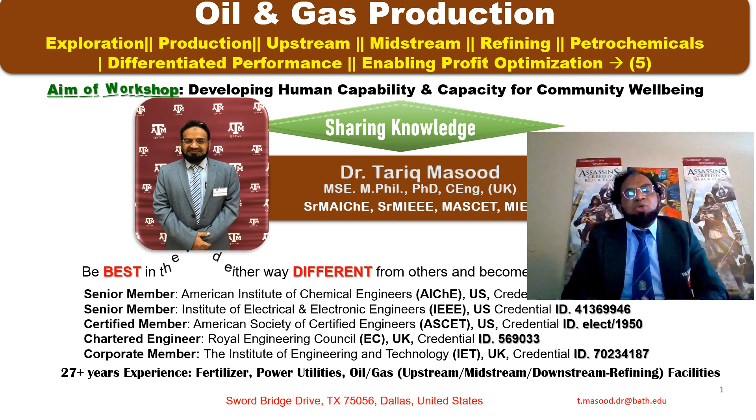Before my lecture, I used to read a Quranic verse, Qala Rabbi Shrahli Sadri wa Yassirli Amri Wahlal Uqdatam min lisani Yafqahu Qawli Allahumma Rabbi Zidni Ilma. O my Lord, open my chest and ease my task for me and loose a knot from my tongue that they may understand my saying. Allahumma Rabbi Zidni Ilma, O Allah, advance me in my knowledge and true understanding. Thank you very much for your precious time.

Okay, dedicated to faculty members and students, Department of Chemical and Environmental Engineering, GCT and NFC-IET Multan, Pakistan. In particular, Professor Dr. Saeed Ahmed, rest in peace, and Professor Dr. Afzal Haq, former Vice Chancellor and pioneer of NFC-IET Multan, Pakistan, and former VC of NED UET Karachi. And certainly Professor Dr. Tahir Imran Qureshi, Maestro of Organic Chemistry.

Faculty members and students, Department of Petroleum and Chemical Engineering at Texas A&M University, College Station and Qatar campus. Faculty members and students, Department of Chemical Engineering, Gas Processing Center, Industrial Engineering at Qatar University. Management and operations and maintenance staff members of Pak Arab Fertilizer: calcium ammonium nitrate, nitrophosphate, urea, nitric acid, ammonia, and OGDC, Oil and Gas Development Corporation, in particular Qadirpur gas field, Ghotaki, Sindh, Pakistan.

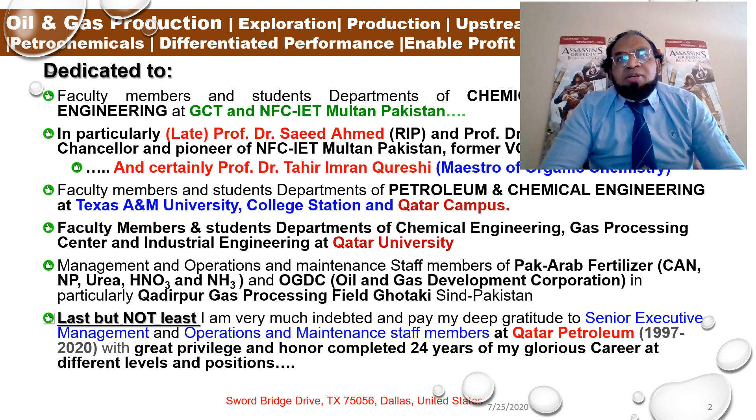Last but not least, I'm very much indebted and pay my deep gratitude to the senior management and operation and maintenance staff members at Qatar Petroleum from 1997 to 2020. With great privilege and honor, I have completed 24 years of my glorious career at different levels and positions in Qatar Petroleum. Thank you very much everyone for your belief in me and your unprecedented support.

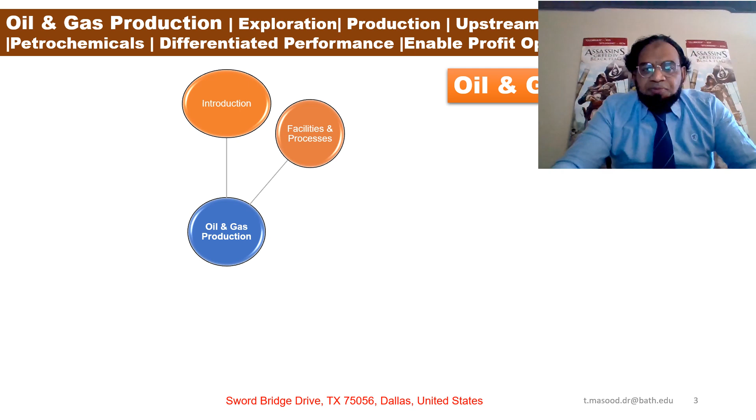Production. Okay, this slide demonstrates my plan for the next couple of years to deliver more than 300 lectures. Introductions, facilities and processes, reservoir and wellhead management system, upstream facilities, midstream facilities, refining facilities, petrochemicals, utility system, conventional and unconventional resources and environmental effects. Okay, on my next slide, I will demonstrate what I have contributed over the last 24 years with Qatar Petroleum.

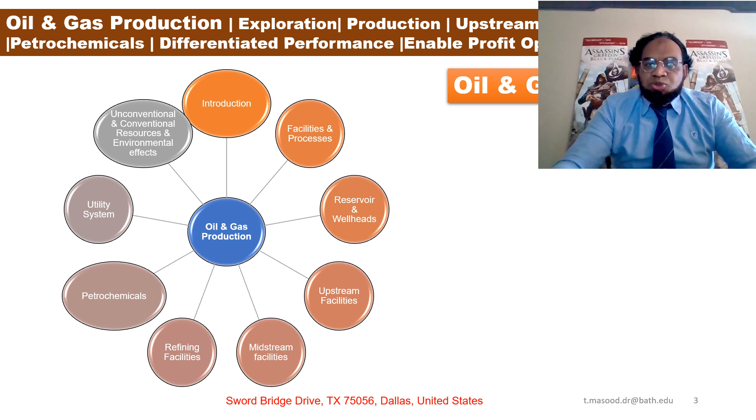Okay, shaping the clean and sustainable global energy. As I mentioned earlier, I'm Dr. Tariq Masood. I have contributed significantly and developed in-house a large number of models by using artificial intelligence. First model, Operation Excellence, 20 initiatives framework and TORs developed and implemented. More important, second, a flaring surveillance model, monitoring and measurement we have implemented. A gas lift management system and gas balance dashboard management system we have developed and implemented.

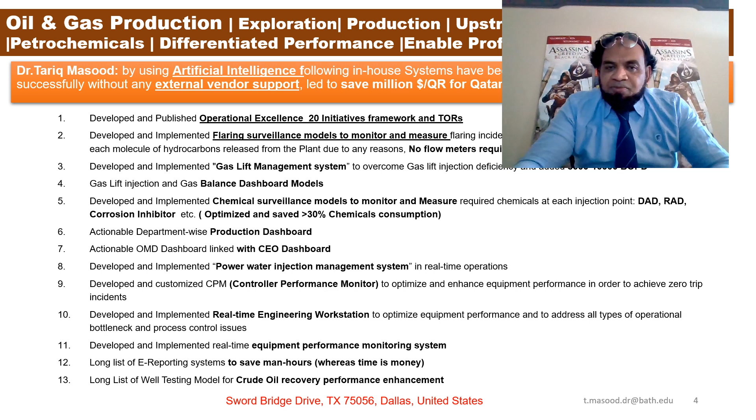Number 5, developed and implemented chemical surveillance models. Number 6, actionable production dashboard, including a CEO dashboard and power water injection management systems, CPM controller performance monitoring systems, real-time engineering workstations, equipment performance and monitoring systems, and a long list of e-reporting models developed and implemented. Last but not least, a long list of well-testing models developed and implemented in Qatar Petroleum by and large.

Okay, on my next slide, we'll give a brief about my lecture number 5 and key takeaway points. So from my next slide, we'll give a brief about the key takeaway points from lecture number 5, and then I will run the complete lecture number 5. What is the upstream processing section? Okay, these are my key takeaway points from lecture number 5.

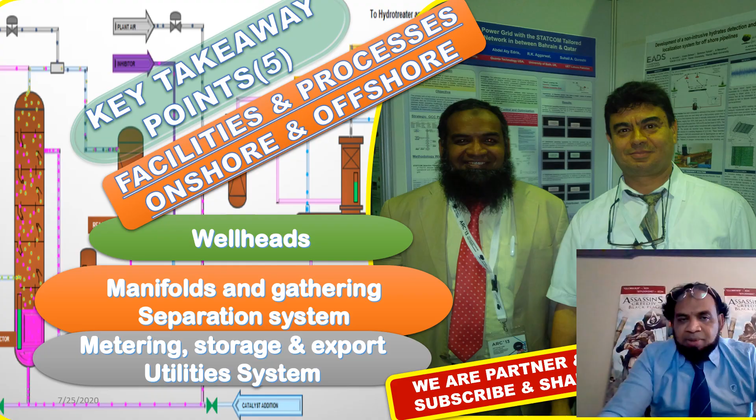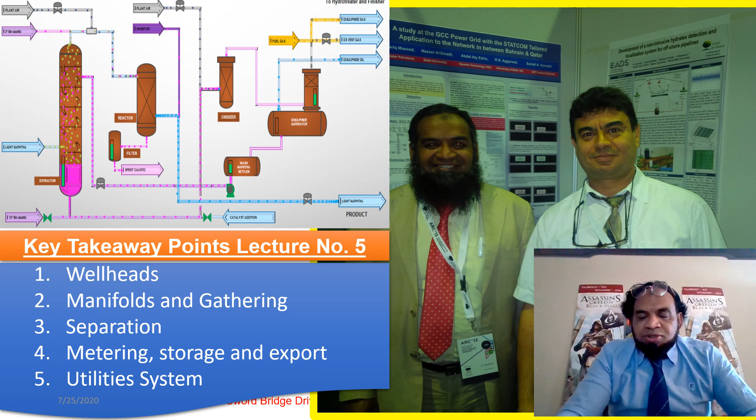We're going to discuss number 1, wellheads, then manifolds and gathering system, separation system, number 4, metering and storage export system, and number 5, utility systems. These are the 5 sections we will discuss today as far as upstream facilities or processing sections are concerned.

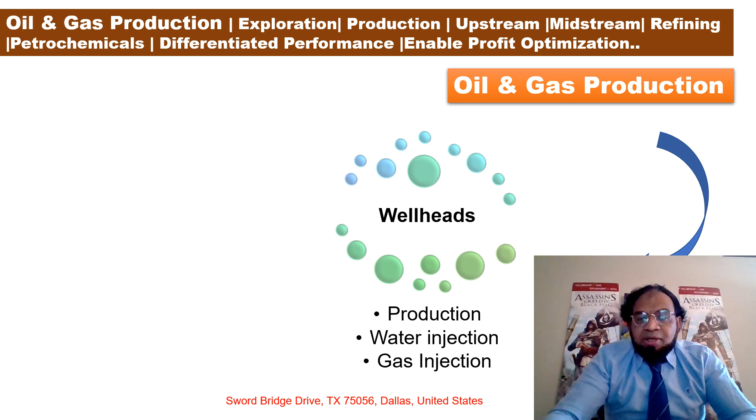Okay, oil and gas production. The first segment we are going to discuss is the wellhead. The wellhead constitutes 3 types of wells: production wells, water injection wells, and gas injection wells. What it basically demonstrates: once a natural gas or oil well is drilled and it has been verified that commercially viable quantities of natural gas are present for extraction, the well must be completed.

To allow petroleum or natural gas to flow out of the formation and up to the surface, this process includes strengthening the well hole with casing, evaluating the pressure and temperature of the formation, and installing the proper equipment to ensure an efficient flow of natural gas from the well. The well flow is controlled with a choke valve, so it has different dimensions.

We differentiate between a dry completion, which is either onshore or on the deck of the offshore structure, and a subsea completion, which is below the surface. The wellhead structure, often called a Christmas tree, must allow for a number of operations relating to production and well workover. Well workover refers to various technologies for maintaining the well and improving its production capacity as far as demand is concerned. Okay, on my next slide, we will discuss manifold and gathering system.

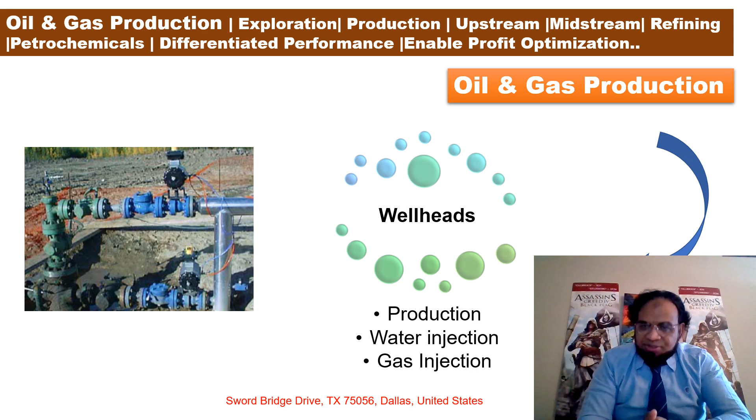In my earlier slide, we discussed the wellhead. Now we are going to discuss manifolds and gas gathering system. Okay, first a gas gathering system, second segment is a pipeline, and number 3 is the reservoir utilization. What it basically demonstrates: it has 2 layers. First is onshore and second is offshore.

The individual well streams are brought into the main production facilities over a network of gathering pipelines and a manifold system. The purpose of these pipelines is to allow sets of production wells to be selected so that, for a given production level, the best reservoir utilization is achieved. Well flow composition, that is gas, oil and water, can be selected from the available wells. For gas gathering systems, it is common to meter the individual gathering lines into the manifold, as we have seen in the pictures here.

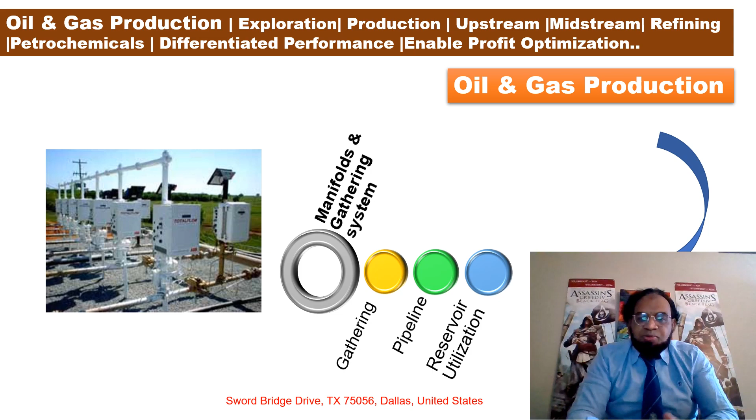So for multi-phase flow, a combination of gas, oil and water, the high cost of multi-phase flow meters often leads to the use of software flow rate estimates that use well-test data to calculate the actual flow rate. Okay, on my next slide, we will further discuss how the manifolds and gathering system can further contribute to compression and other parts of the process.

Okay. Before starting the separation system, I just want to give the second layer of manifolds and gathering system. In my last slide, I discussed only onshore and I missed offshore. Offshore, the dry completion wells on the main field feed directly into a production manifold, while outlying wellhead towers and subsea installations feed via multi-phase pipelines back to the production risers. Risers are a system that allows a pipeline to rise up to topside structures for floating structures. This involves a way to take up weight and movement.

For heavy crude and Arctic areas, diluents and heating may be needed to reduce viscosity and allow the flow. So that is important offshore as far as heavy crude is concerned.

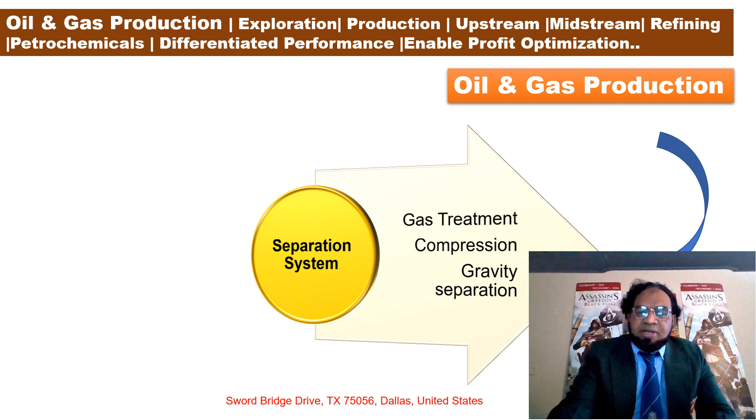Okay, now we will discuss the separation system. First, the separation system is constituted of gas treatment and compression, and gravity separation. What it basically demonstrates: some wells have pure gas production which can be taken directly for gas treatment and/or compression, or more often the well production is a combination of gas, oil and water with various contaminants that must be separated and processed.

The production separators come in many forms and designs, with the classic of various design, and most of them are gravity separators, as we have demonstrated in the picture. In gravity separation, the well flow is fed into a horizontal vessel. The retention period is typically 5 minutes, allowing gas to bubble out, water to settle at the bottom and oil to be taken out in the middle.

The pressure is often reduced in several stages: high pressure separator, medium pressure, or low pressure separators, to allow controlled separation of volatile components. Sudden pressure reductions might allow flash vaporization, leading to instability and safety hazard. On my next slide, we will discuss metering, storage, and export.

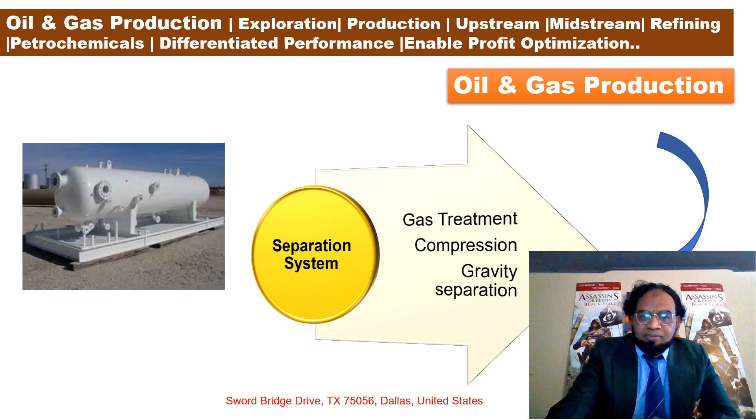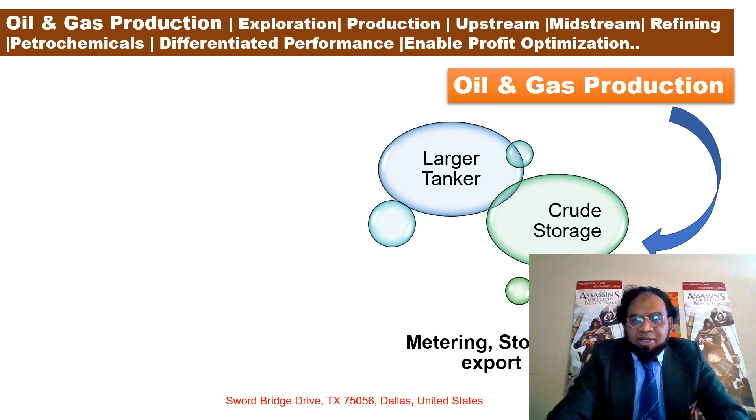Oil and gas production. Now we are going to discuss metering, storage, and export. It constitutes again three segments: large tanker carriers, crude storage, and production lines and pipelines. What it basically demonstrates here: most of the plants do not allow local gas storage, but oil is often stored before loading on a vessel, such as a shuttle tanker taking oil to the larger tanker terminal, or direct to a crude carrier.

Offshore production facilities without a direct pipeline connection generally rely on crude storage in the base, allowing a shuttle tanker to offload about once a week. A larger production complex generally has an associated tank farm terminal, allowing the storage of different grades of crude oil to take up changes in demand and delays in transportation.

Metering stations allow operators to monitor and manage the natural gas and oil exported from the production installations. These employ specialized meters to meter the natural gas or oil as it flows through the pipeline without impeding its movement. The metered volume represents a transfer of ownership from the producer to customers or another division within the company and is called custody transfer metering.

It forms the basis of invoicing the sold product and also for the production taxes and revenue sharing between partners. Accuracy requirements are often set by the government authorities. Typically, a metering installation consists of a number of meter runs so that one meter will not have to handle the full capacity range, and associated prover loops so that the meter accuracy can be tested and calibrated at regular intervals. On my next slide, we will discuss the utility systems as far as production is concerned.

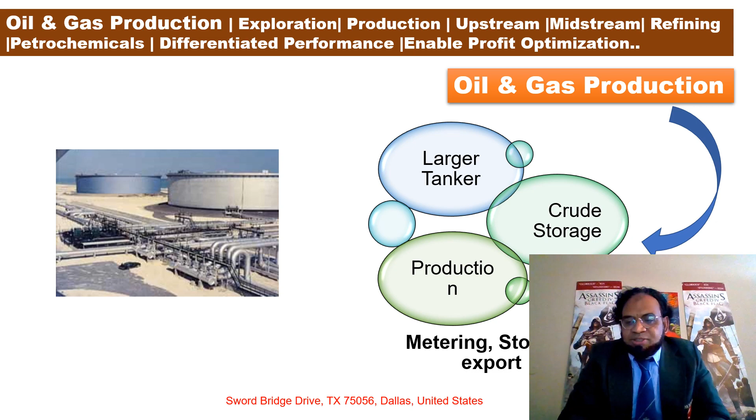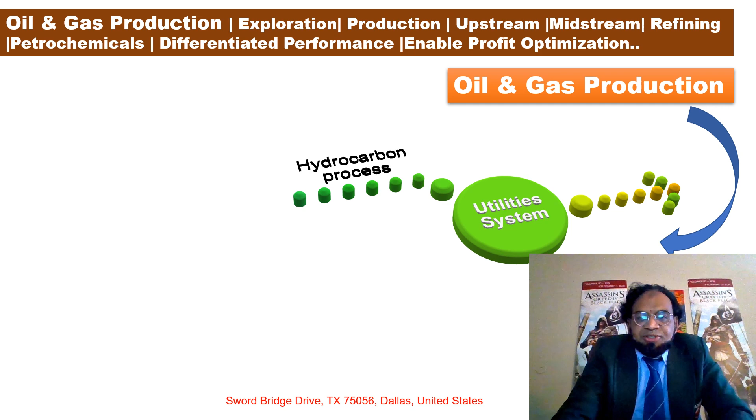In my earlier slide, I discussed metering, storage, and export. Now, this is my last slide. I'm going to discuss utility systems. Utility systems constitute again three segments: hydrocarbon process, process safety, and remote installation. Utility systems are systems which do not handle the hydrocarbon process flow, but provide some service to the main process, safety or residents.

Depending on the location of the installation, many such functions may be available from nearby infrastructure, such as electricity. Many remote installations are fully self-sustaining and must generate their own power, water, etc. This was my last slide. On my next slide, I'm going to conclude our two-day lectures, and then I will give my plan for the next lecture.

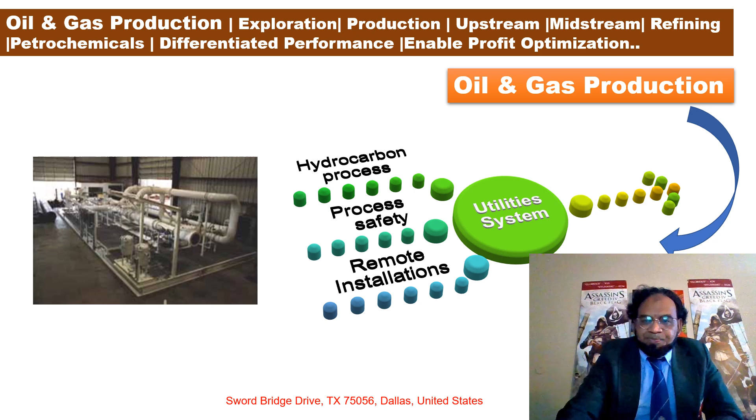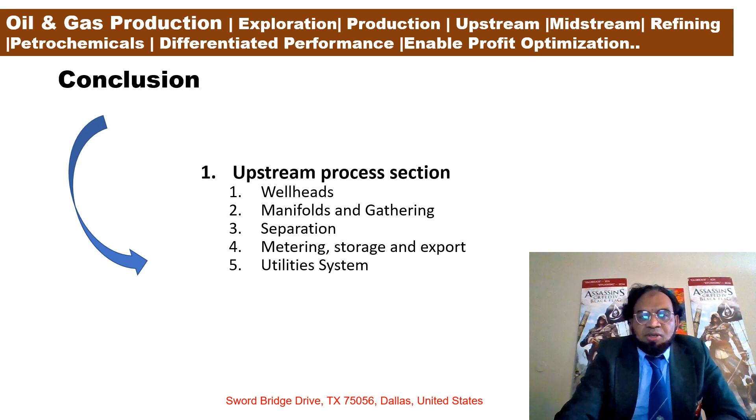Conclusion now. Today we have discussed wellhead, manifolds and gathering systems, separation, metering, storage and export, and utility systems. In my forthcoming lectures, we will discuss gas plants, gas compression, pipelines, and LNG liquefaction and gasification systems.